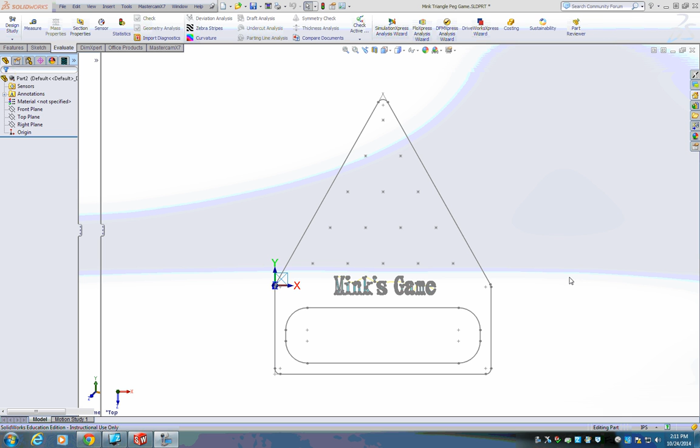This is what we're going to make. This is a triangle pegboard game. First, as always, File and New. Make sure you have part selected and click OK.

Save it right away. File, Save As. Make sure you put down your name and what it is. Also double check where you're saving it to so you know where. Just double check and make sure that it's at least in your network drive. The organization is up to you. Click Save.

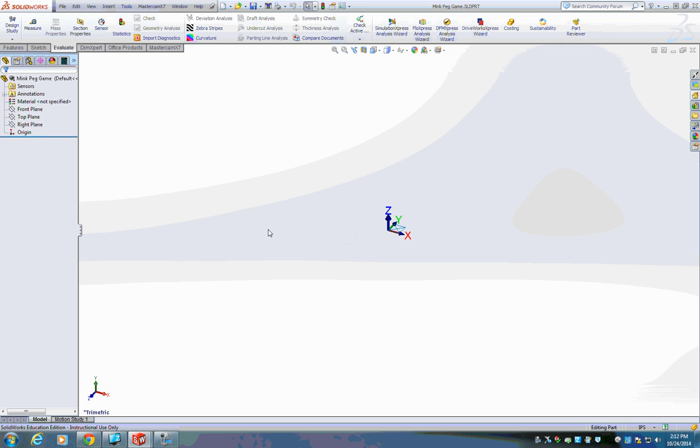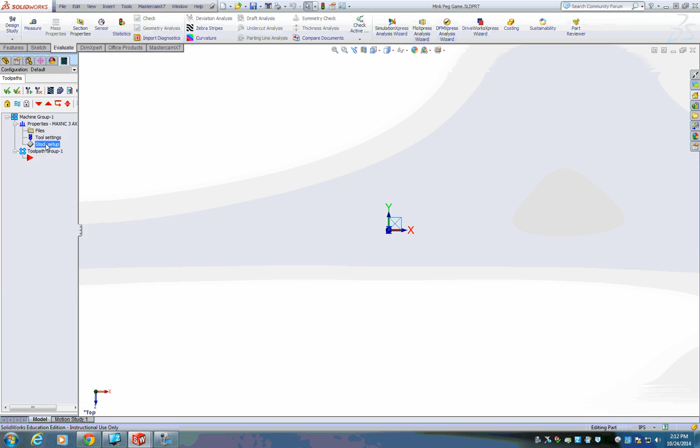We're going to start in the top view as always. And instead of drawing right away, we're actually going to set our stock size first. So we're going to go to these wavy lines, the Toolpath Manager, making sure that it says MAXNC 3. Do the plus sign next to it and do the stock setup. Click on Display.

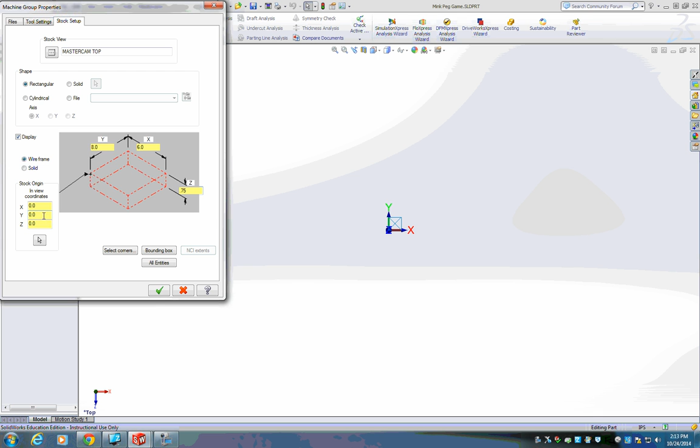Your Y-axis is going to be 8, and your X-axis is going to be 6. Your thickness, or Z-axis, is 0.75. Your 0 is, again, lower left-hand corner, and make sure your coordinates say 0. Check mark, and a dotted rectangle should show up for you. If you rotate your view, you can see the thickness. So this is at least telling you what your board is going to be like.

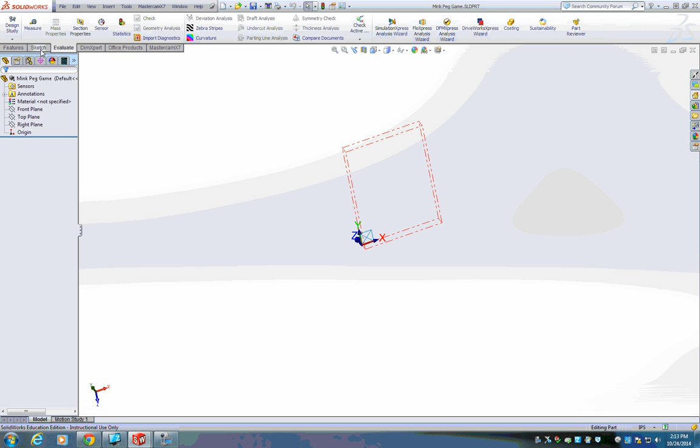We need to place the triangle game somewhere within this board. At least center, or at least that's our goal. You can always move it around after we make it, but this will guide you. Now go back to your feature manager and to Sketch. I'm going to go back to my top view. Make sure I know where I'm at.

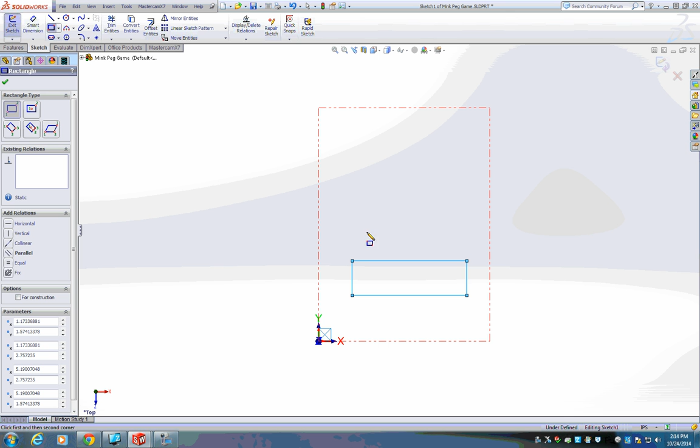Now we can start drawing our game. Let's start with a rectangle. We're on the top plane. And we're just going to draw a rectangle over here. This rectangle is going to be a 5-inch by 2-inch. And then we're going to draw our triangle on top of it. We can line up the midpoint of our rectangle with our triangle. There we are. We're going to make this triangle an equilateral triangle.

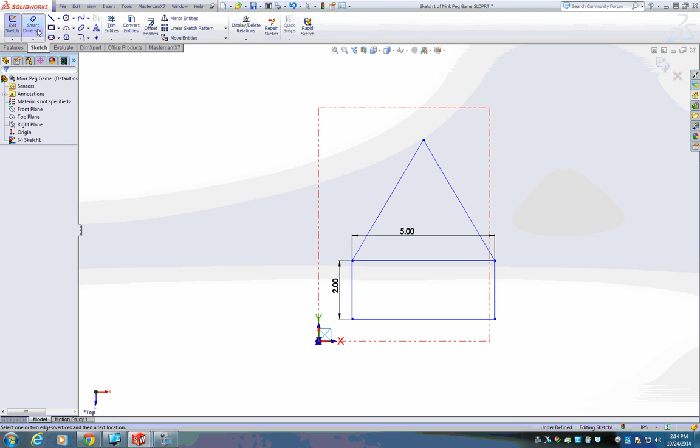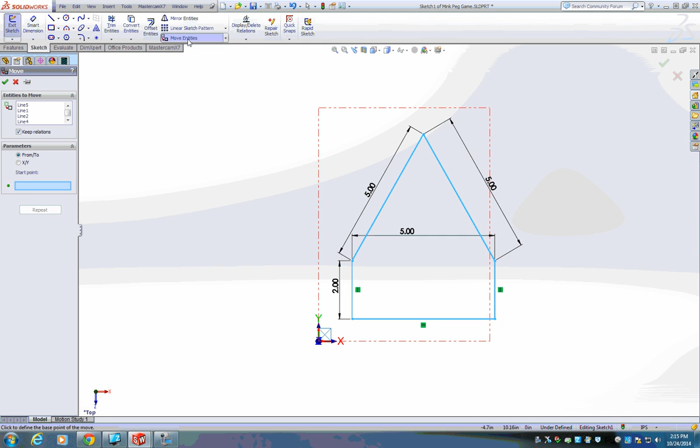We no longer really need this line, so we can select it and delete it. Now we can place this where we would like to. Drag a box around everything. Go to Move Entities. Click on Start Point. And then click where you want to grab it and place it centered within this block. Make sure you press Save.